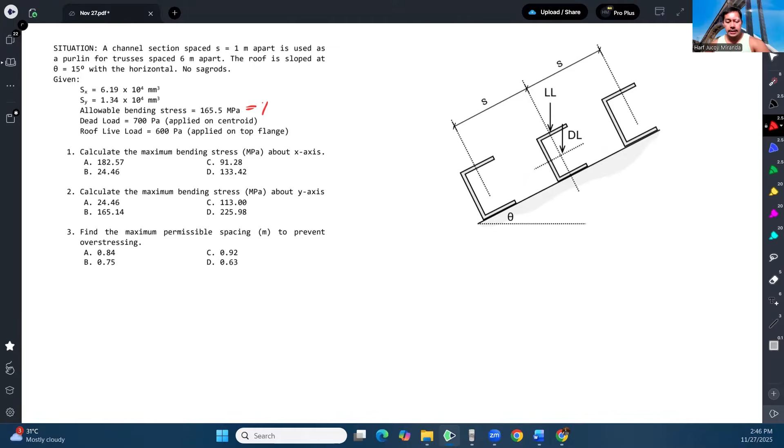This allowable bending stress is assumed to apply to both x and y axes since the problem doesn't specify otherwise. The spacing of the purlins is 1 meter, and the trusses are 6 meters apart, which becomes the span of the purlins.

We are given the dead load and the roof live load. The dead load is 700 Pascals applied at the centroid. Note that in the actual exam there was no figure, just this description. The dead load is applied at the centroid, while the roof live load is applied at the top of the flange. This means the dead load won't cause torsion on the purlin, while the roof live load will cause torsion due to its component.

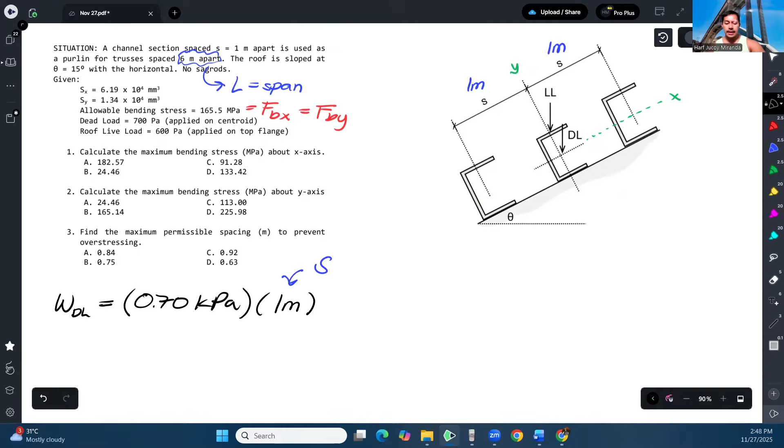Let's start with the dead load. We convert it to kilonewtons per meter. The dead load is 700 Pascals, or 0.7 kilopascals. To convert to kilonewton per meter, multiply by the tributary width, which is the spacing of 1 meter. So it's still 0.7, since kilopascal is kilonewton per meter squared, and the meter units cancel out.

The live load follows the same process: 0.6 times 1 meter equals 0.6 kilonewtons per meter.

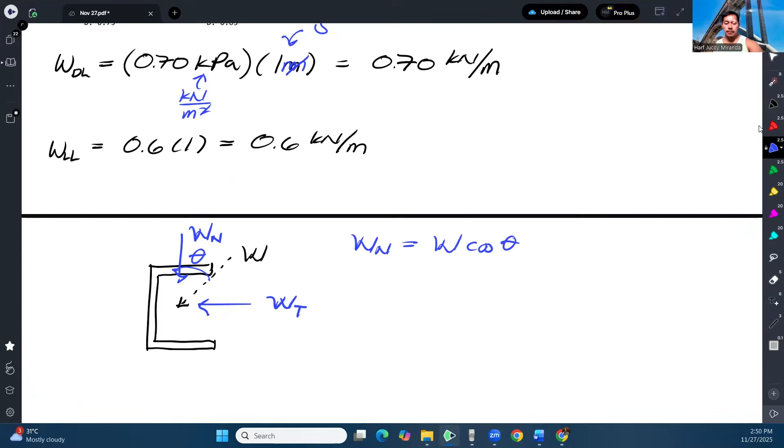The normal component is the y-component of the load, while the tangential component is the x-component of the load, based on the angle theta. So the normal load equals W times cosine of the roof slope, while the tangential load equals W times sine of the roof slope. This normal component, Wn, causes bending about the x-axis, while the tangential component causes bending about the y-axis.

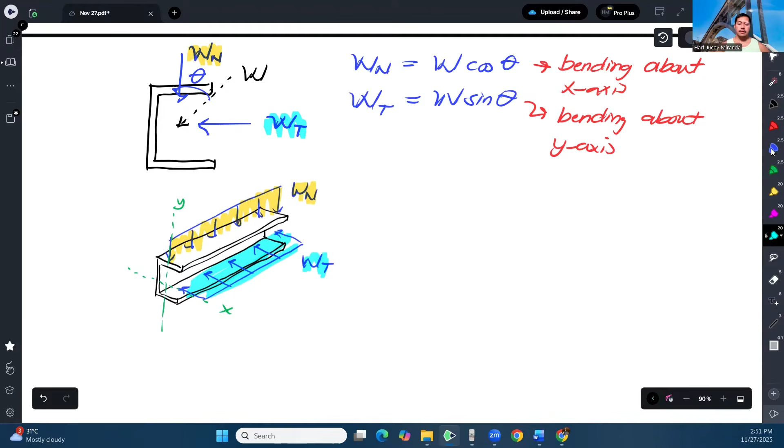For both live load and dead load, for bending about the x-axis, the normal component passes through the centroid. Even though the live load's normal component is applied at the top of the flange, it still passes through the centroid. This means both loads will not cause torsion, so we can combine them directly.

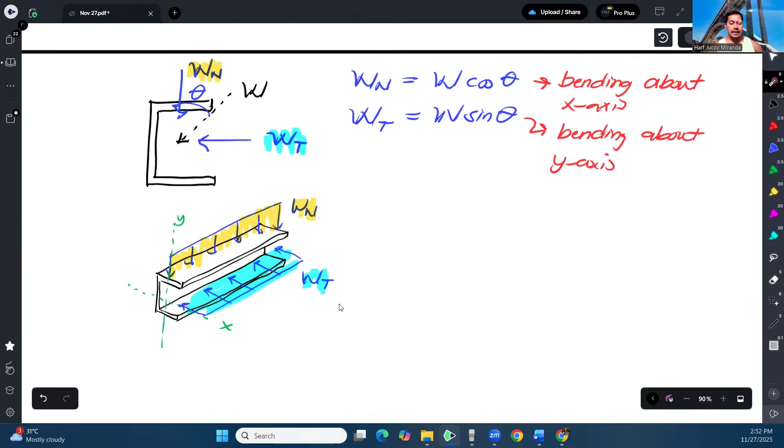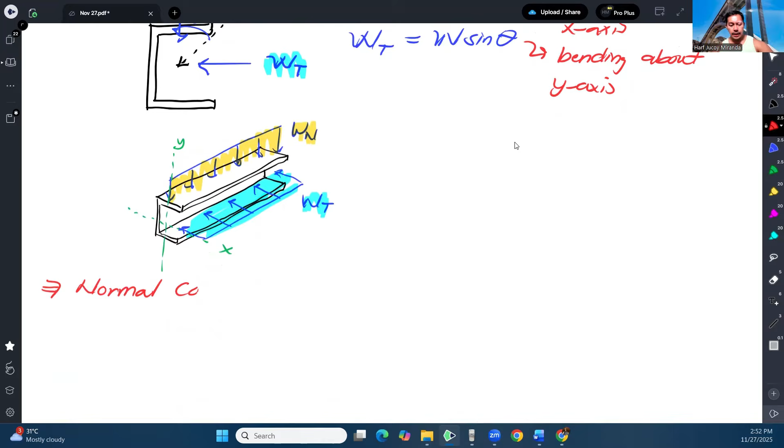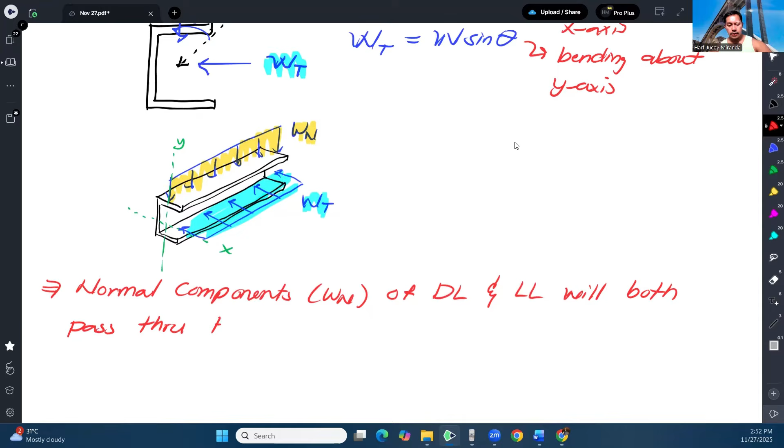Let's combine the live load and dead load directly for their normal components. The normal components, WN, of both the dead load and live load will pass through the centroid, so there will be no torsion.

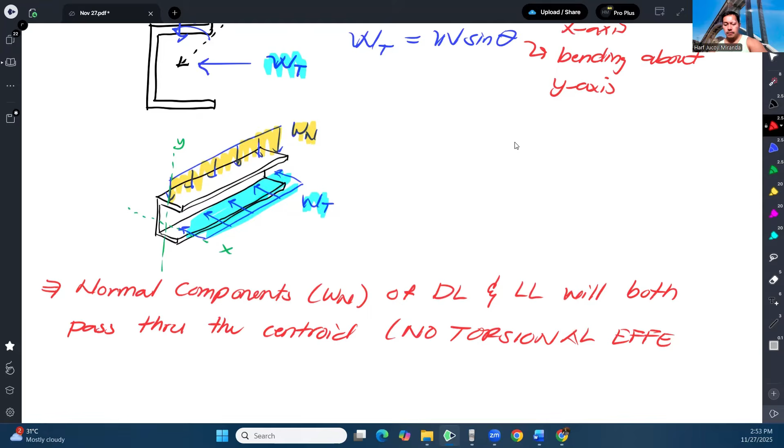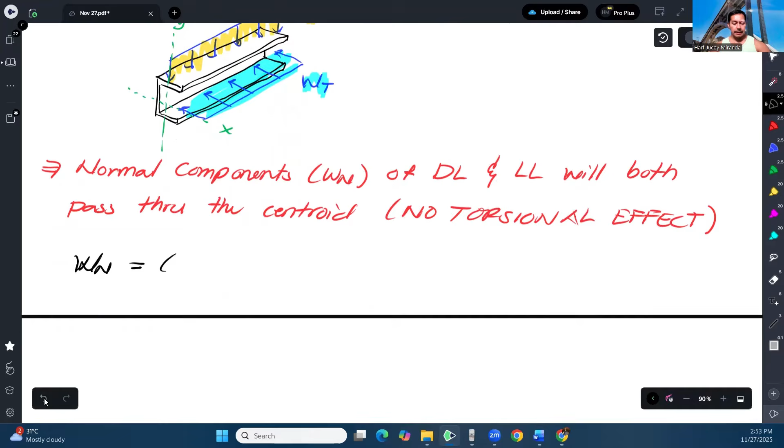Okay, so dahil doon, pagsamahin na lang natin. So mangyayari, yung normal component natin will be 0.7 cosine, di ba cosine pag normal? Cosine nung 15 plus 0.6 cosine ng 15. Or basically, pwede yung ipag-add yung 0.7 tsaka 0.6. So that's gonna give us this value, 1.2557 kilonewton per meter.

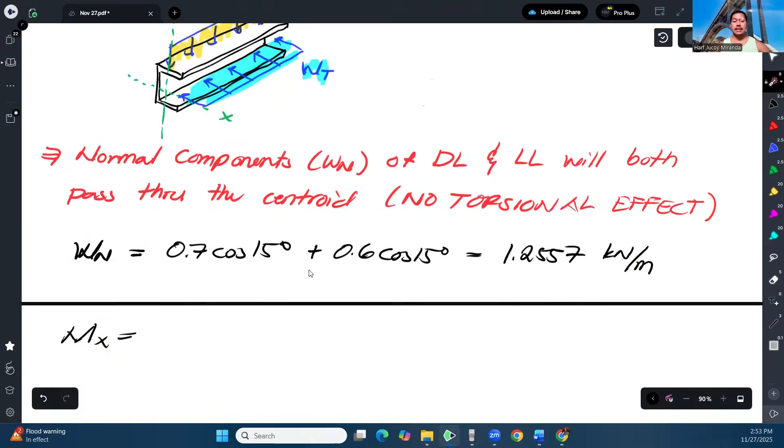Okay, so therefore, we can calculate now the moment about the x-axis. Kasi nga, di ba sabi natin, yung normal component ng load is mag-cause ng bending about the x-axis, as discussed here. Ito will cause bending in this direction, about x-axis. While itong W sub T will cause bending about the y-axis.

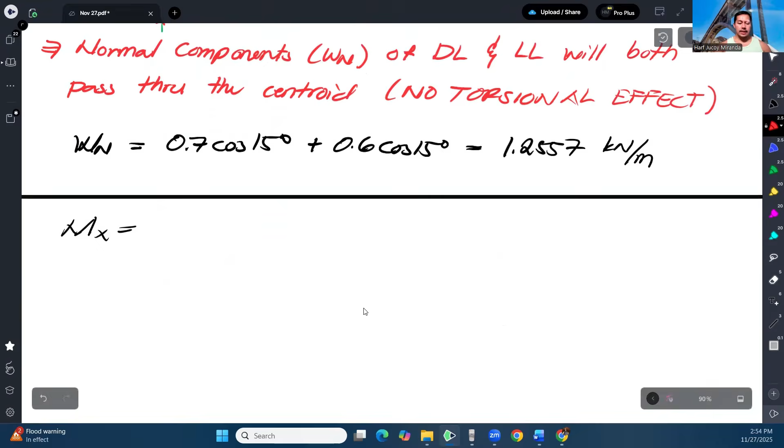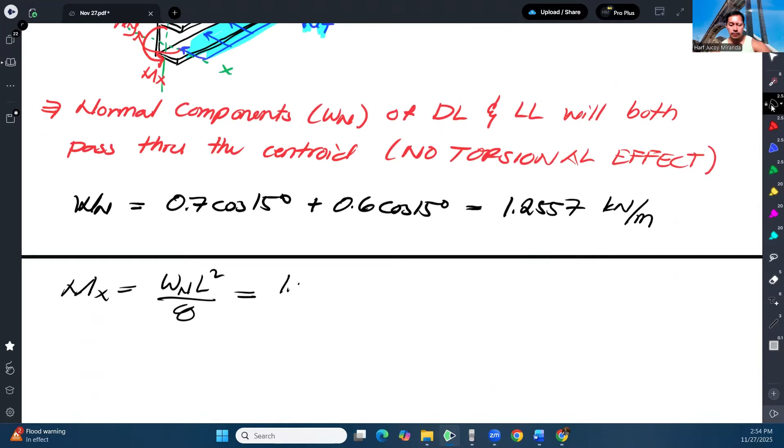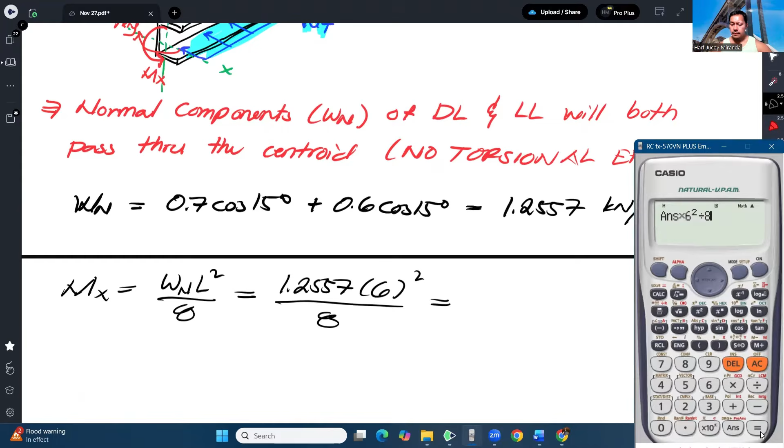MX, MY. Alright, so what is MX? Dahil simply supported lang ito, so WL squared over 8. So that is that value, L is 6 squared over 8. So that's gonna give us 5.651 kilonewton meter.

And from there, we can compute for the FBX. Pwedeng ano sana yun, MC over I. Kaya lang, ang binigay kasi sa atin, elastic section modulus. So, we will use S. And dahil walang torsional effect itong WN na to, so, we will use SX as is.

So, ano bang mangyayari kapag merong torsional effect? Ang ginagawa natin, conventionally, wala ito sa NSCP, hindi ito sinabi sa code. Pero conventionally, ang ginagawa is, ginagawang kalahati itong SX. Hina-half natin. Kumbaga, nire-reduce na lang natin yung strength niya. Dahil merong torsional effect.

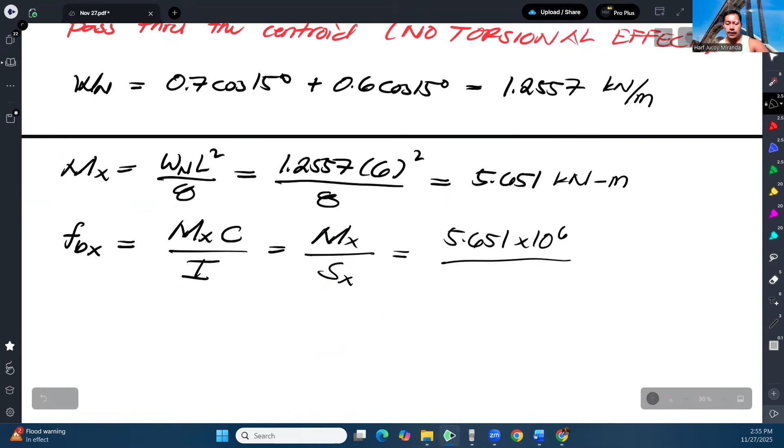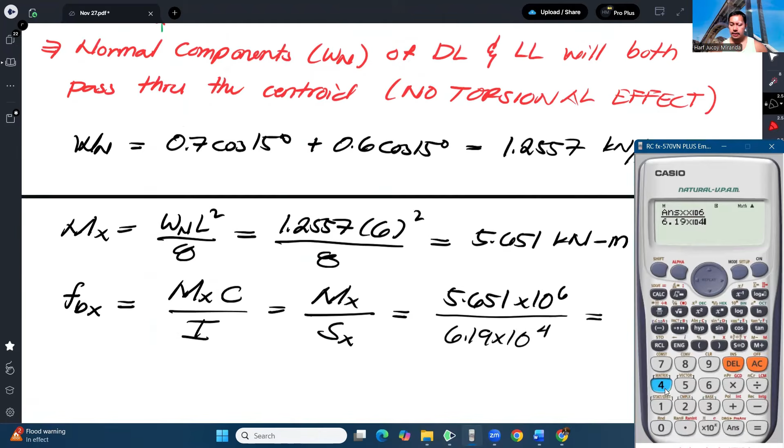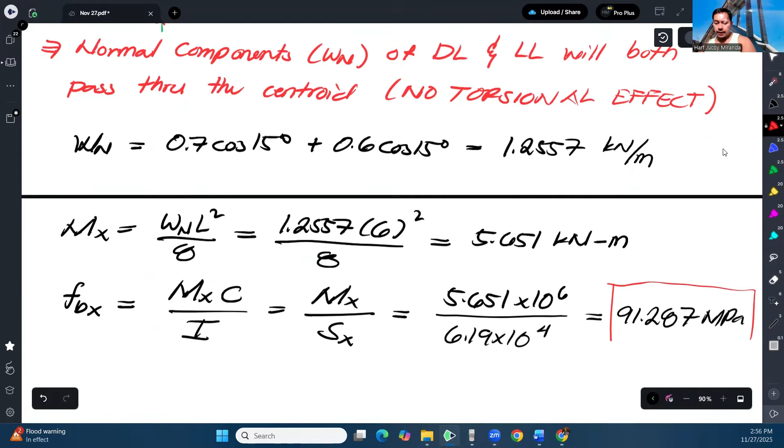So anyway, this would be, lagyan ko lang ng value, 5.651. Gawin natin Newton mm over SX, para lang maging megapascal yung sagot. Yung SX natin ay 6.19 times 10 to the 4. Okay, and that's gonna give us answer times 10 to the 6 over 6.19 to the fourth. So that is 91.287 megapascals. And that would be our bending stress about the x-axis. So 91.28.

Alright, next, calculate the bending stress about the y-axis naman. So sa y-axis, kailangan lang natin compute ngayon itong W sub T. Kaya lang, be careful here. Pansinin po natin na yung roof live load natin nasa taas. So pag kinuha mo yung y component or yung tangential component niyan, dito yung patama, pag ganyan. Tapos yung sa dead load, tatama pa rin sa centroid. So yung sa dead load, it will not cause torsion. Pero yung sa live load, dahil nandiyan na sa ibabaw, may kukos siya ngayon ng torsion. So dito, wag natin pagsamahin, paghiwalayin natin dahil merong tayong tangential na magkakos ng torsion.

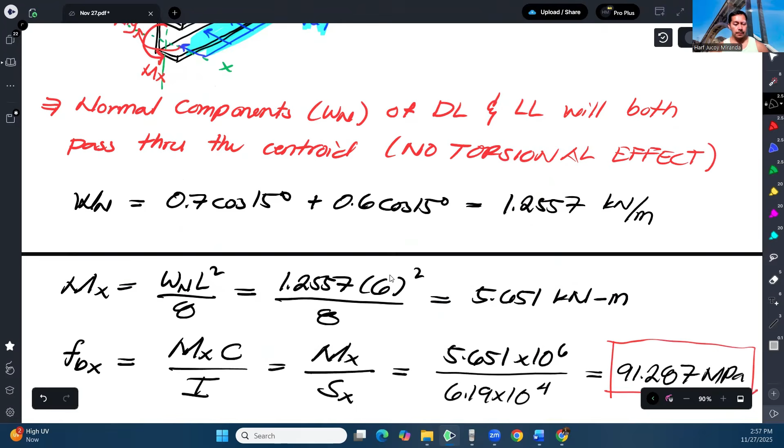Okay, so for number 2, kunin ko lang yung W sub T nung live load. That is 0.6 sine of 15. Tapos yung tangential ng dead load, that is 0.7 times sine of 15.

And then, ang mangyayari, dahil magkahiwalay yung analysis natin dito, kukunin natin yung moment na i-cause ng live load, tas yung moment na i-cause naman ng dead load. So, magkahiwalay. Okay, so, but the formula is the same, WL squared over 8. At ito rin, kasi walang sagrods, so same lang.

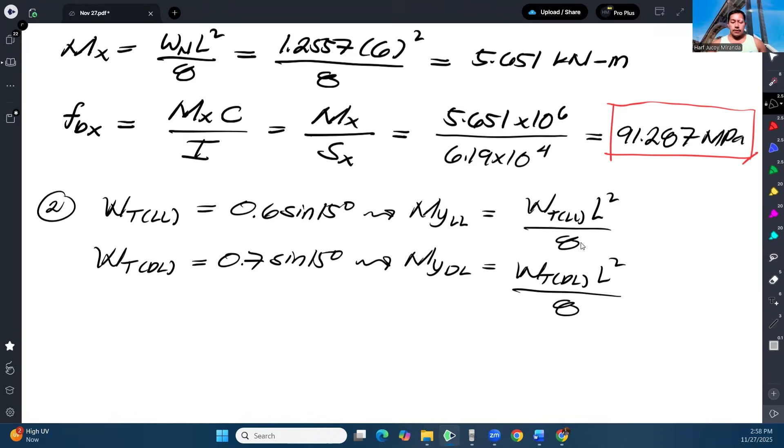Okay, so and then after that, mako-compute natin ngayon yung bending stress sa Y. So, bali yung bending stress sa Y will be the combination ng bending stress sa Y dahil sa dead load at yung bending stress sa Y dahil sa live load. So, pinaghiwalay ko kasi nga, meron tayong adjustment na gagawin dito sa live load dahil mag-cause siya ng torsion. Okay, and how do we analyze that?

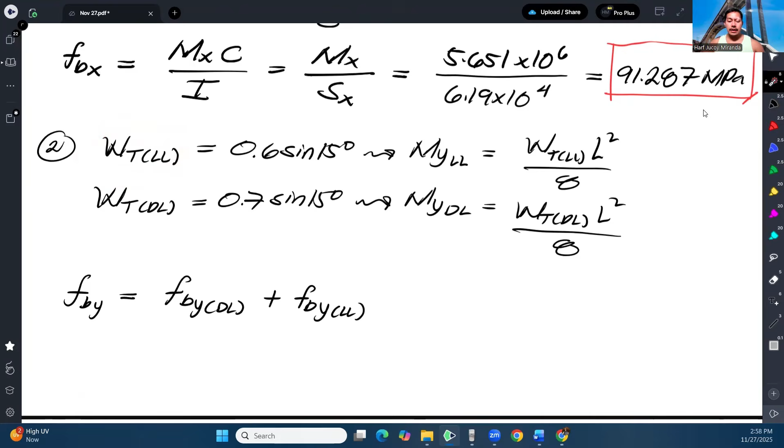So, ganito. Bali yung sa dead load, yung moment natin sa Y ni dead load, dinidivide natin ng SY. Plus, yung moment naman natin sa Y dahil kay live load, dinidivide din natin supposedly ng SY. Kaya lang, dahil nga yung component na yun mag-cause ng torsion, conventionally, ang ginagawa ay dinidivide ito ng dalawa. Okay, dinidivide natin by half. Or rather, minumultiply natin by half para i-reduce yung magiging strength niya. Kumbaga, yun na lang yung adjustment kapag merong torsional effect yung load. Okay, and yun talaga yung ginagawa conventionally.

Pero ulitin ko lang, kahit hanapin nyo ito sa NSCP, walang ganyang sinabi sa NSCP. Ang mangyayari, magiging complicated yung computation kasi there will be exact way of solving this with torsion. Pero sa board exam, ang ginagawa din ng examiner ay ganyan, hinahalf na lang. Kaya kumbaga, it is a simplified approach.

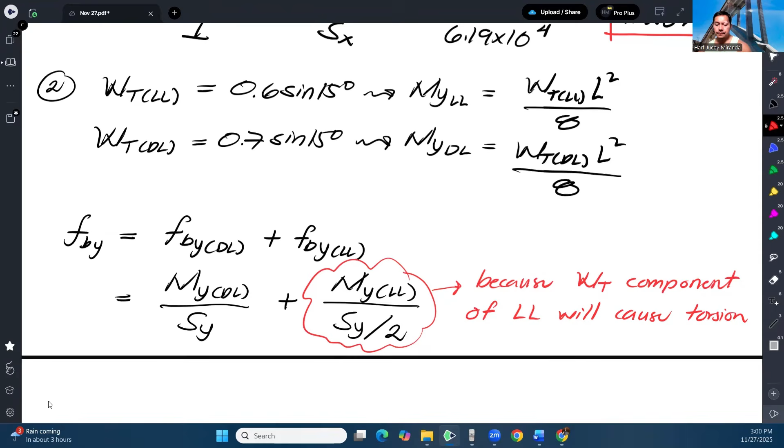So here, 0.6 sine 15, in kilonewton per meter, times L squared over 8 to get the moment. So this is our moment. So 0.698, 699.

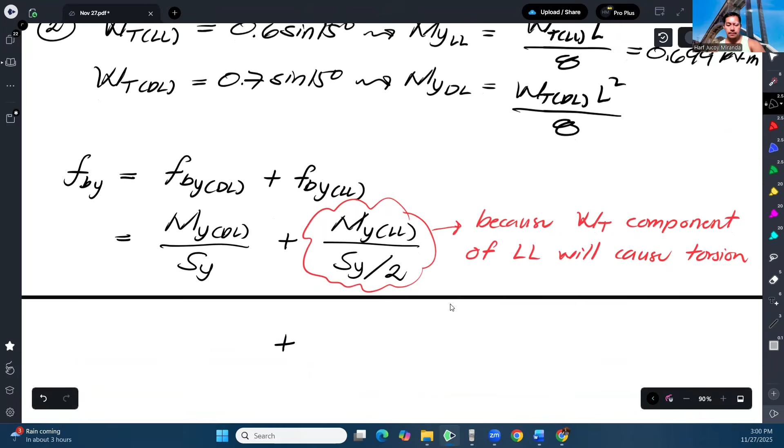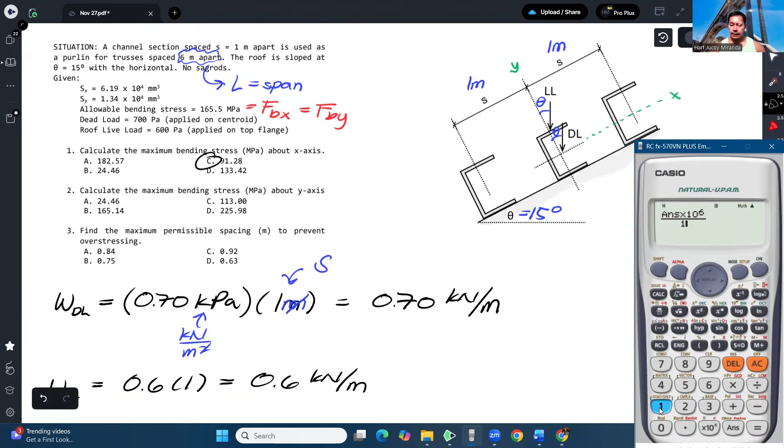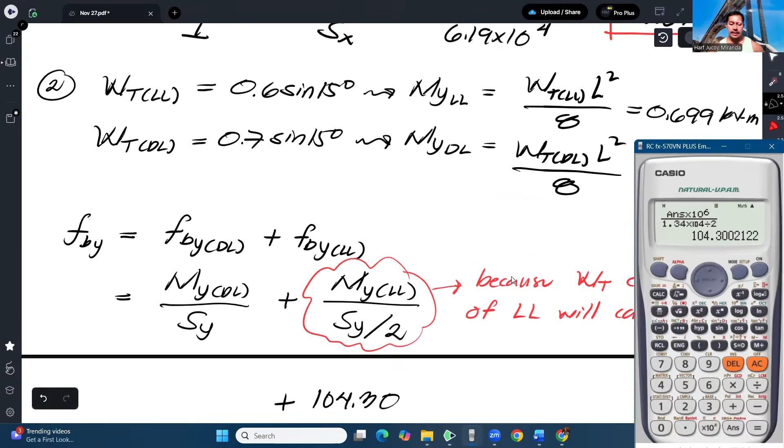Okay, then let's get the live load, right? So let's get this. So that's our moment, moment times 1 million over SY. So our SY is 1.34 times 10 to the 4th. But because this live load causes torsion, we divide this by 2. So that's now the bending stress about Y. So 104.3. Okay, now for FBX, let's go back here.

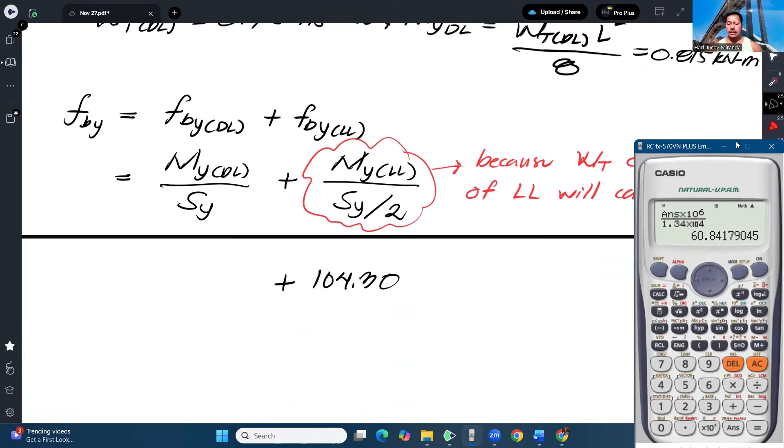Okay, so 0.7 sine 15, still the same, L squared over 8. This is the moment, 0.815. Okay, then moment divided by SY. So moment divided by SY, but no more over 2. So 60.84. So therefore, the total bending stress is 165.14. Okay, so that will be our bending stress about the y-axis.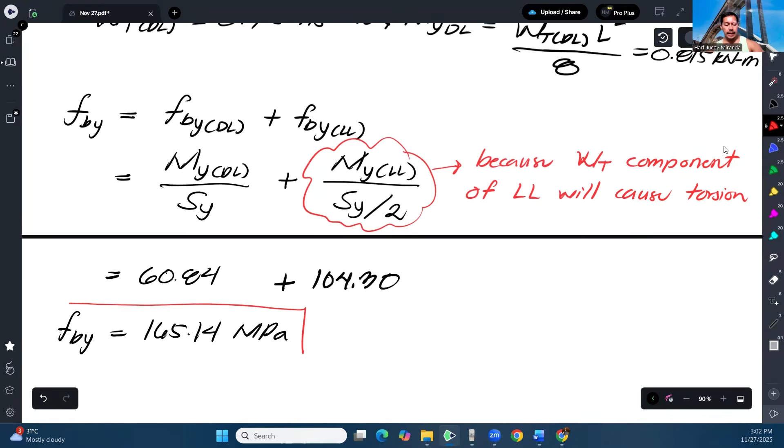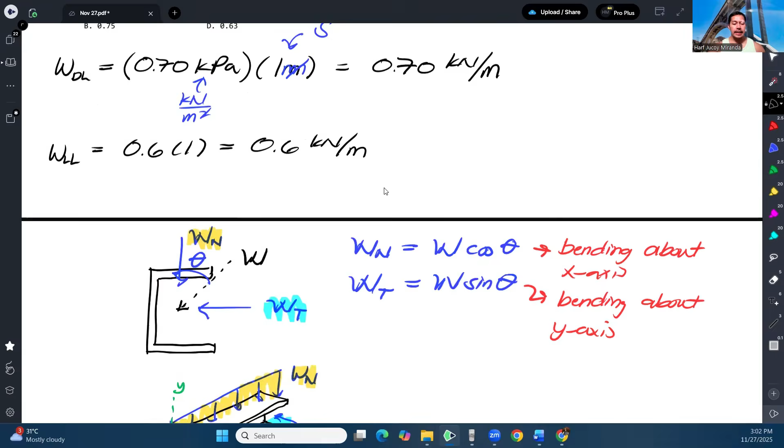Okay, and then lastly, find the maximum permissible spacing to prevent overstressing. So now we recompute the spacing. So for number 3, since this is biaxial bending, our criteria is FBX divided by the allowable plus FBY divided by the allowable should not exceed 1. Okay, and before I compute that, this is given in the problem.

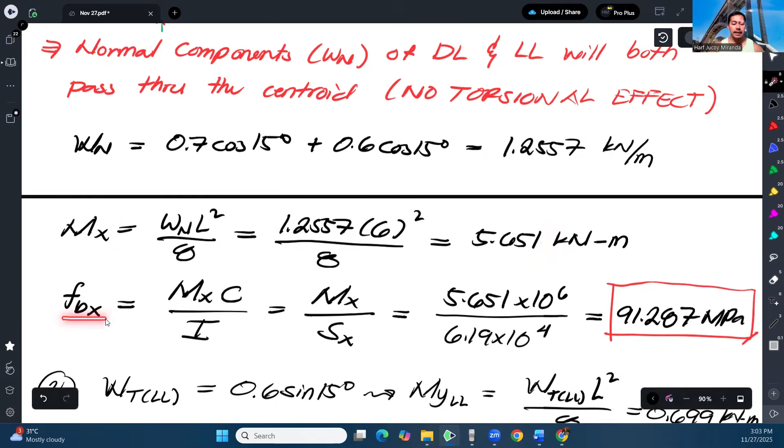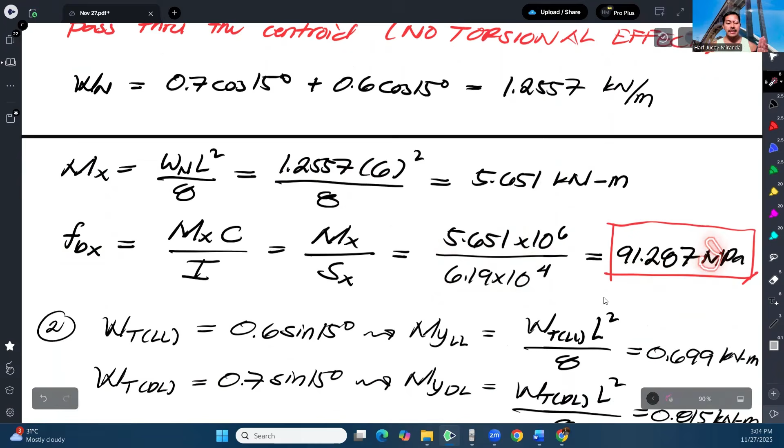So when you compute the value, this. Then there's a times S here. So that means, if you want to write the bending stress about X in terms of the spacing, this is still the value of the coefficient, just with an S here. So that means for FBY, it's the same - this is still the value, just with an S here. Okay, and that's simple - once you realize that, it simplifies the computation a lot.

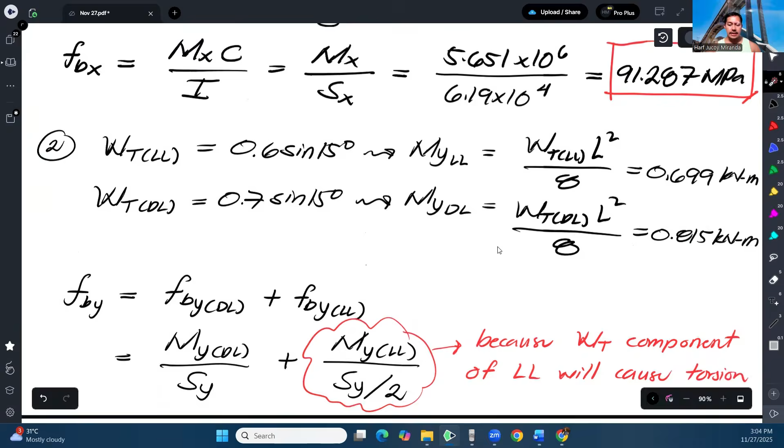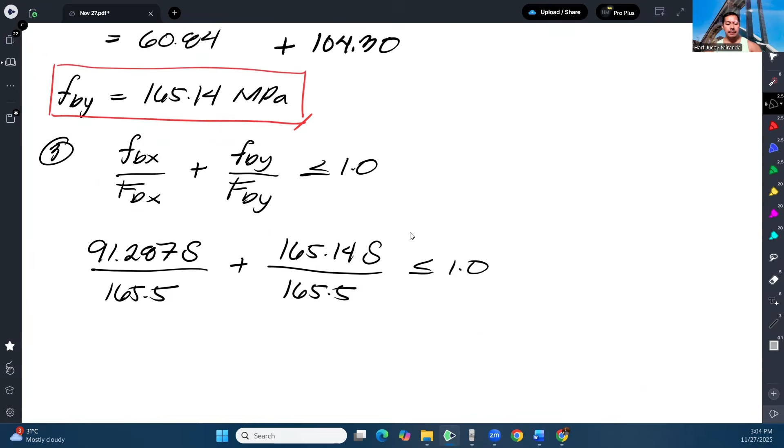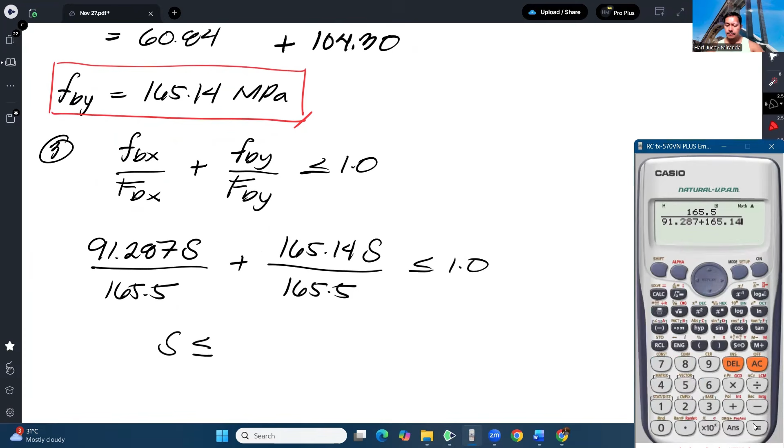So it becomes 91.287 S over 165.5 for FBX, plus FBY which is 165.14 times S over 165.5. And that should not exceed 1. And from there, you can easily solve for S. So S should not exceed - when you cross multiply, 165.5 divided by 91.287 plus 165.14. So that's gonna give us 0.645.

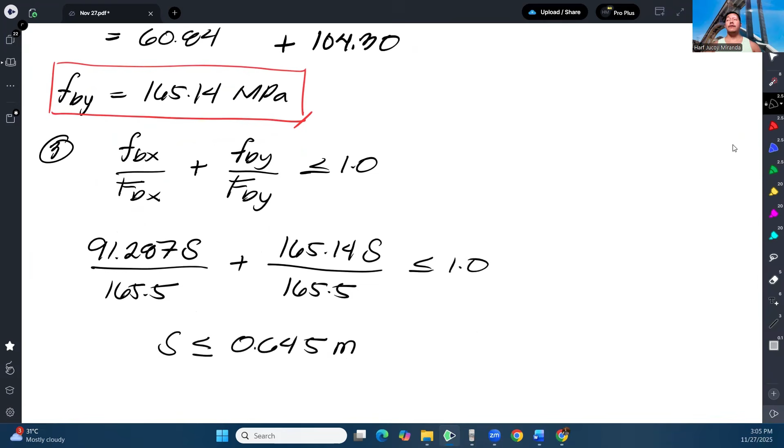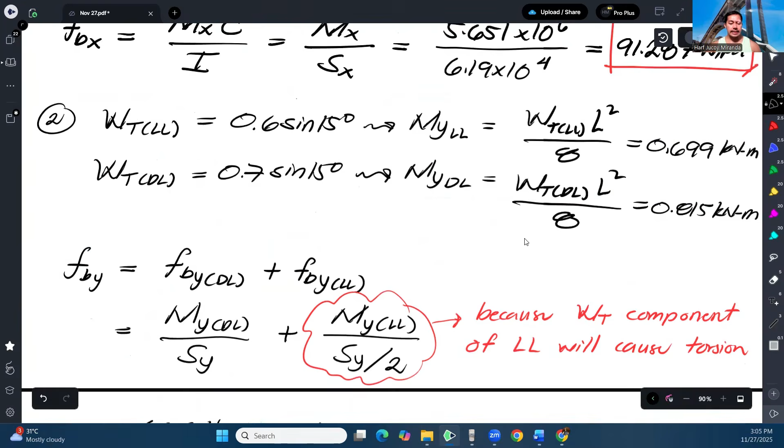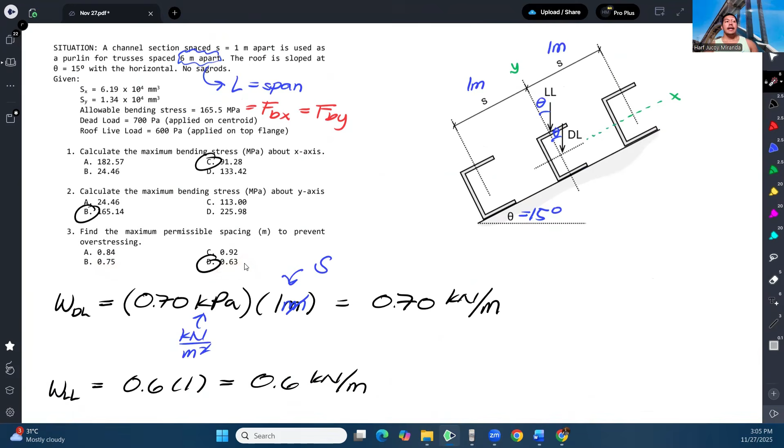So the spacing should not exceed 0.645 meter to avoid overstressing. And in the choices, we can use the next lower value, which is 0.63. Okay, and that will be our answer. So our answer here, maximum allowable spacing is 0.645. But in the choices, we cannot choose 0.75 because that exceeds it. So this is the correct answer. Okay, and that's how we solve this problem.